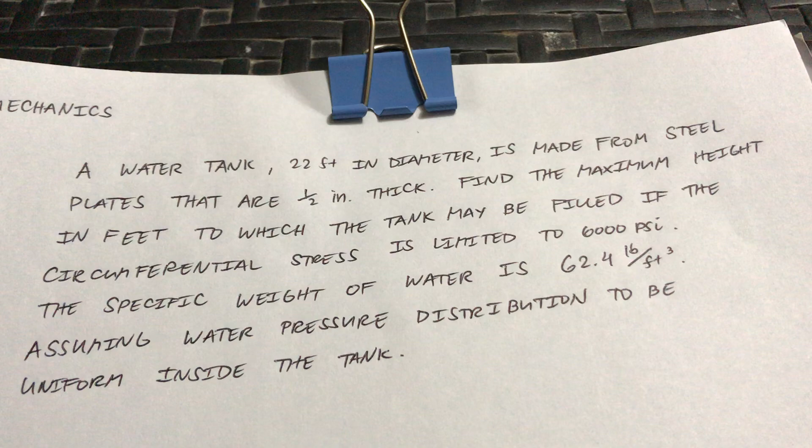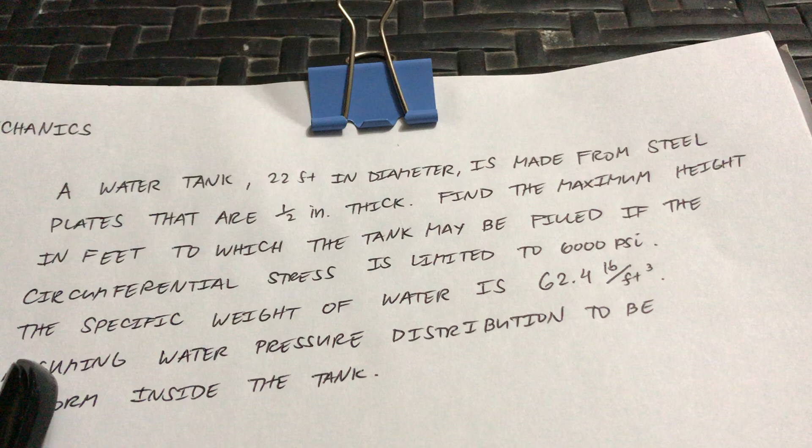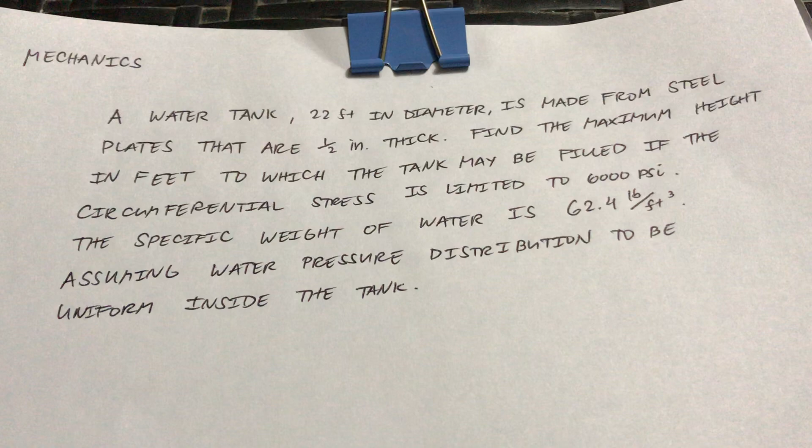Hello everyone, in this video this is the problem that we will solve. We have a water tank 22 feet in diameter made from steel plates that are 1/2 inch thick. Find the maximum height in feet to which the tank may be filled if the circumferential stress is limited to 6,000 psi. The specific weight of water is 62.4 pounds per cubic feet, assuming water pressure distribution to be uniform inside the tank.

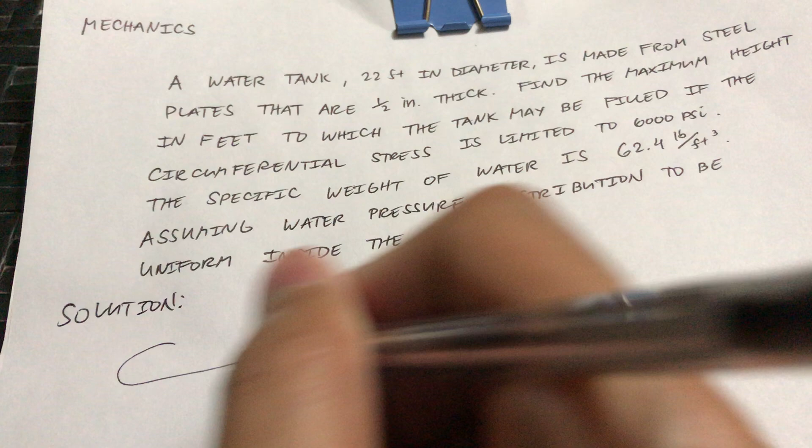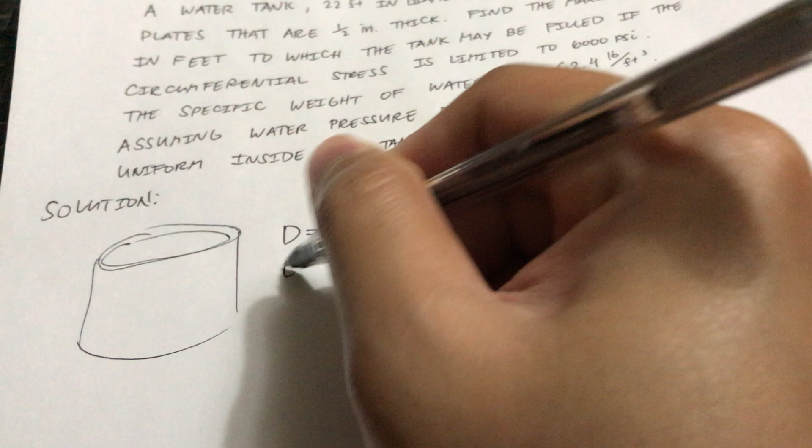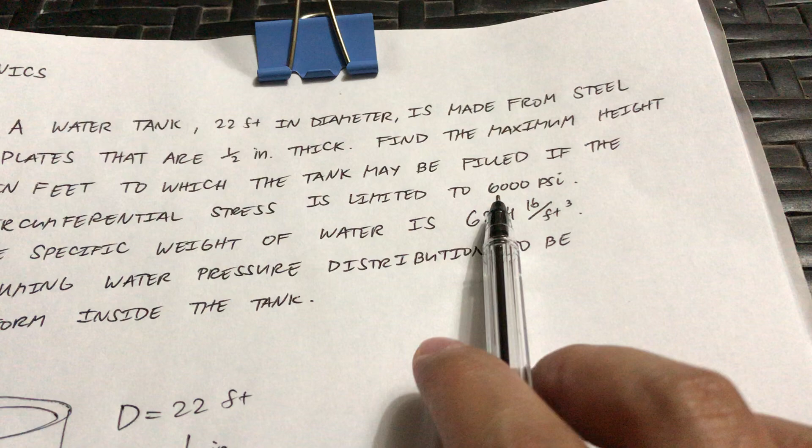Okay, solution. So in this problem, we will have a tank that has a diameter of 22 feet and a thickness of 1/2 inch. Now the question is, what should be the maximum height that we can put in the tank so that it will not exceed the circumferential stress of 6,000 psi.

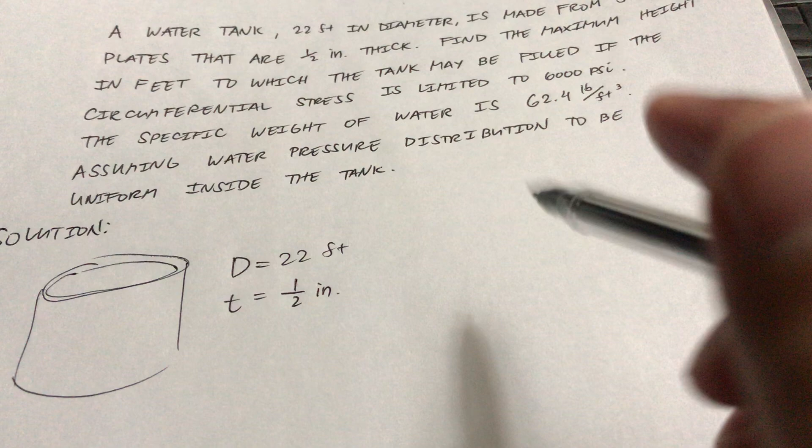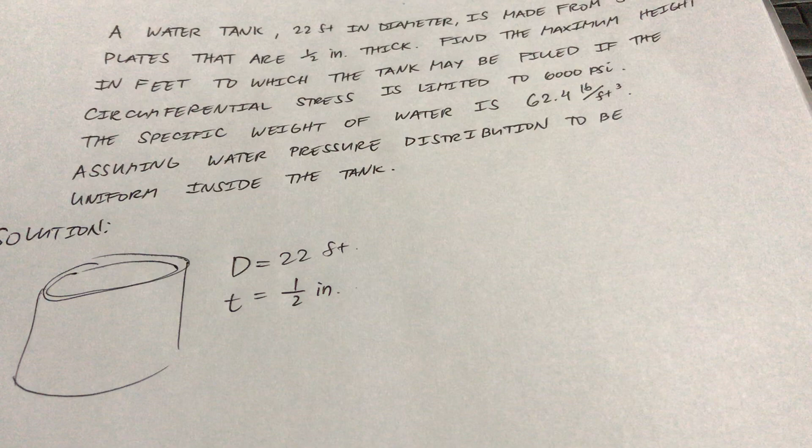Now for this problem, this is considered to be a thin-walled vessel due to the proportion of the diameter and the thickness. The thickness is very small compared to the diameter, which you can determine the specific ratio in our module. So this is under thin-walled vessels, a thin-walled tank.

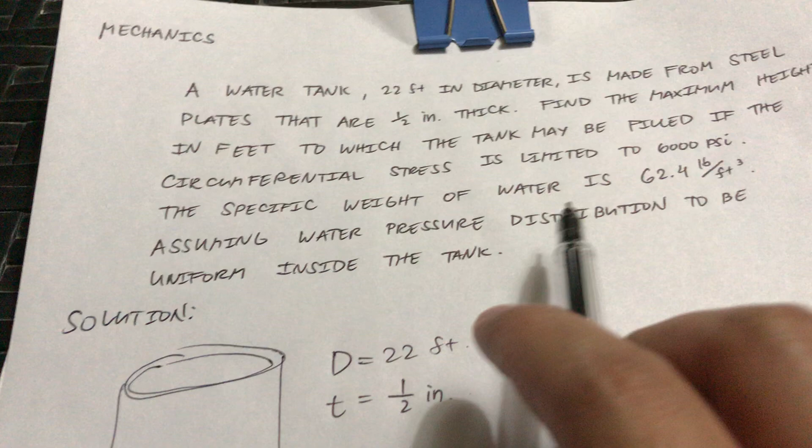Now, the formula for the circumferential stress of a thin-walled tank or vessel is, we have the pressure times the radius of the tank all over its thickness.

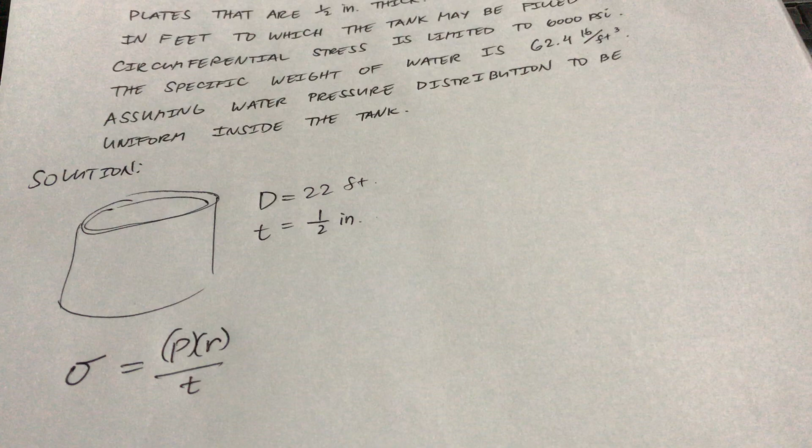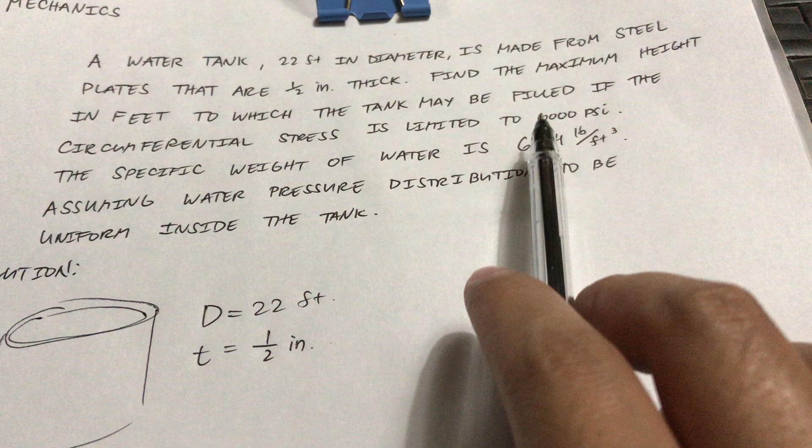Now we are given with the specific weight of the water, and we are given with diameter, the thickness, and we are given with the limiting circumferential stress. Circumferential stress is 6,000 psi.

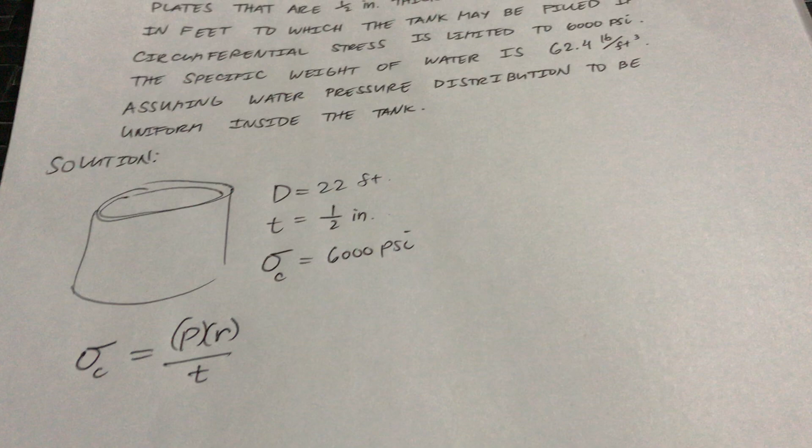Okay, first we need to identify how the water affects the tank. Now, with the water level, let's say for a height of h, since that is the question of the problem, the water will apply pressure to the tank sideways.

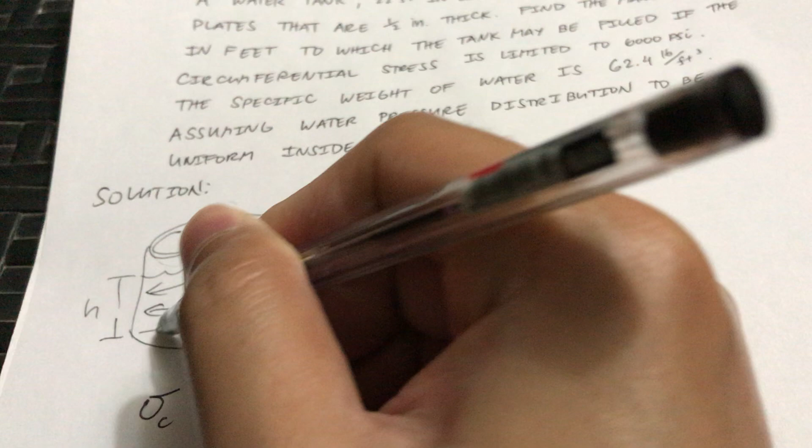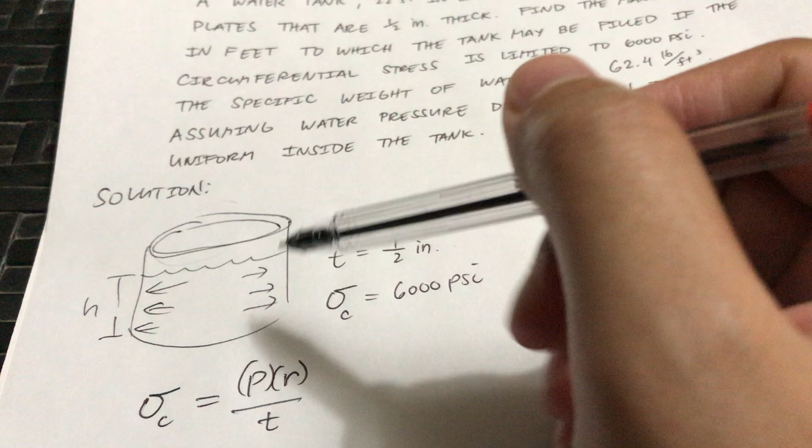Since we are not concerned for the longitudinal stress, we are only concerned with the circumferential stress. So we will consider the force, the effect of the water that will tend to affect the circumferential stress. So the force of the water will try to move sideways and try to break apart the tank.

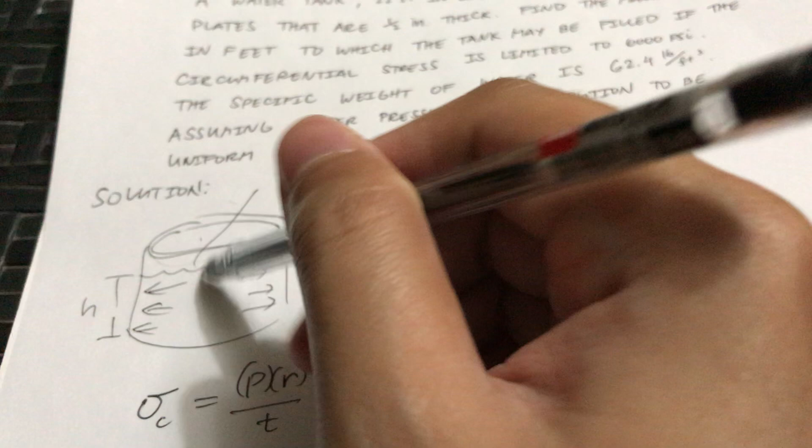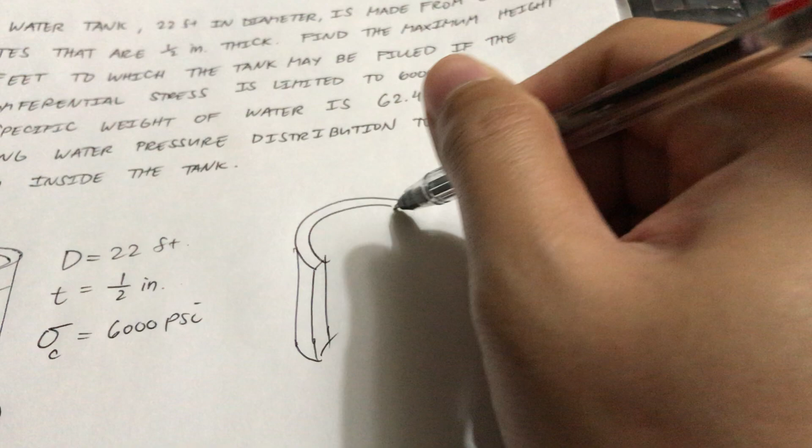Now, to bring out the forces that are affecting the tank, let's try and cut the tank along this plane. So we will have the tank, right. So the force of the water will now be moving sideways. Yeah, the force of the water.

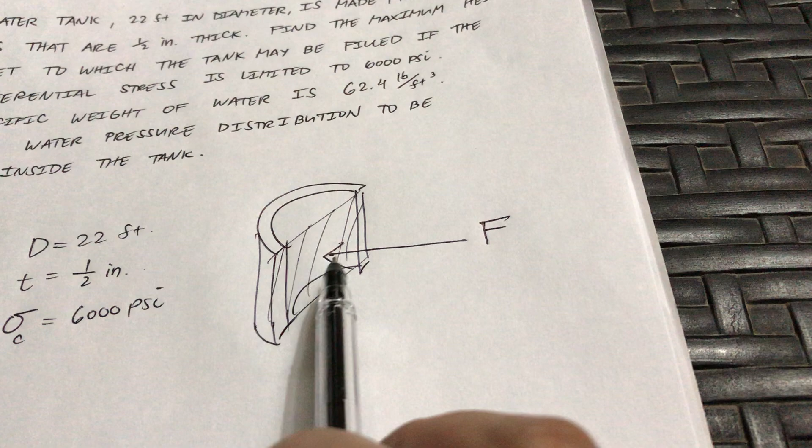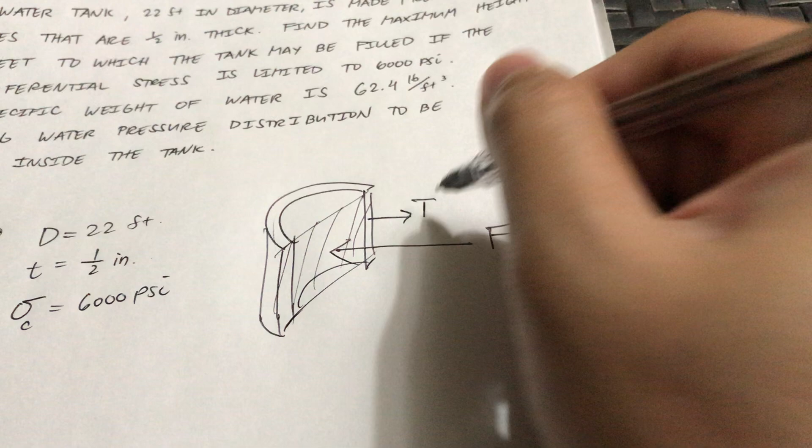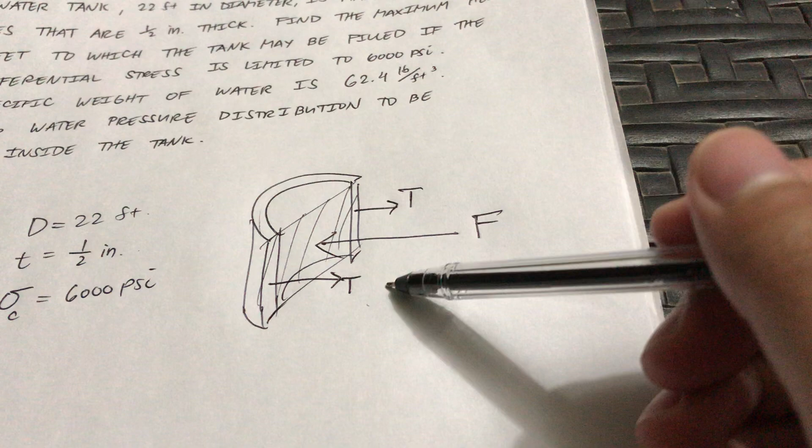And now, to prevent the tank from bursting, the circumferential sides of the tank will apply a resisting force, which we can set as letter T. The force of the water and then the resisting tension developed inside the tank. Now this is 2. One we have here for this side, the other one is for this side. Okay, so there are 2.

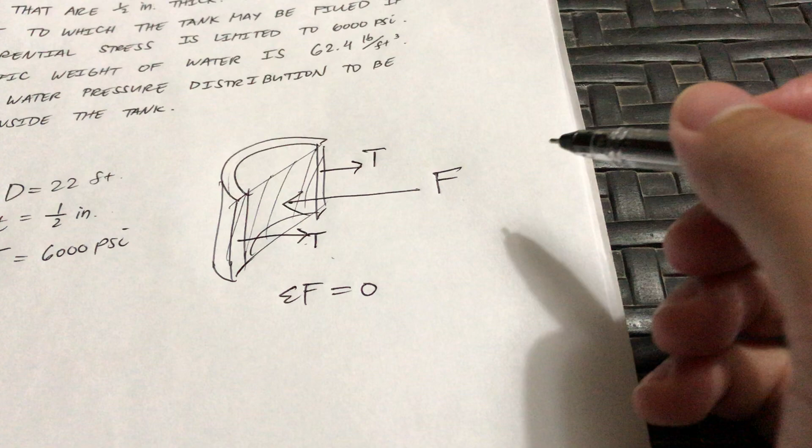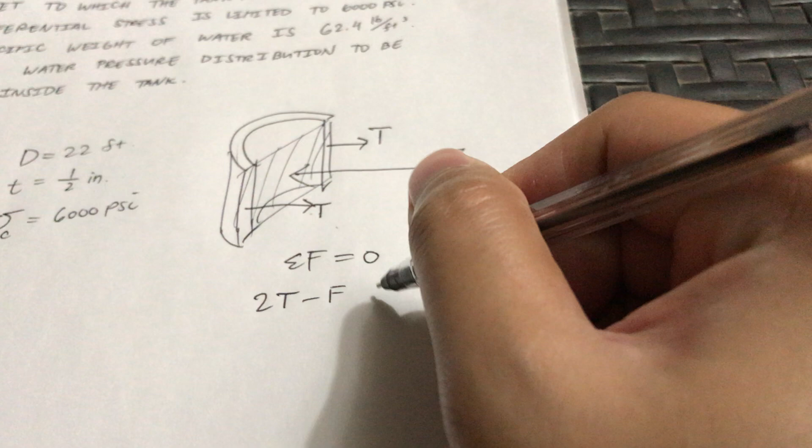So if we sum up forces, is equal to 0 to make the tank remain balanced. So we will have, assuming the T is positive, so that becomes 2T minus F is equal to 0. Now, how do we relate the T and the F with our given?

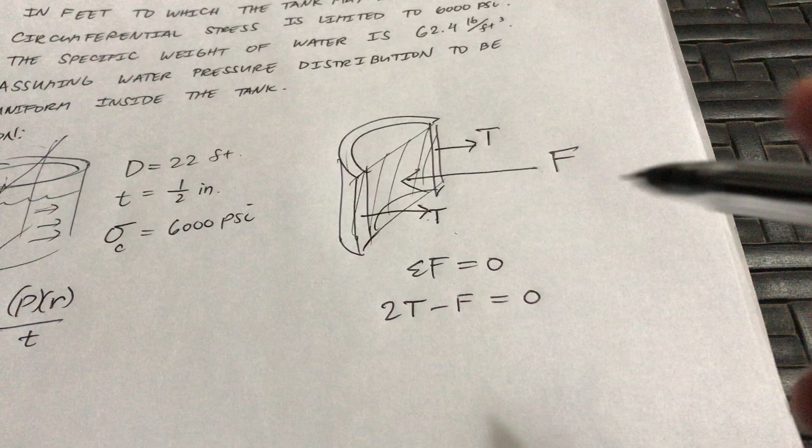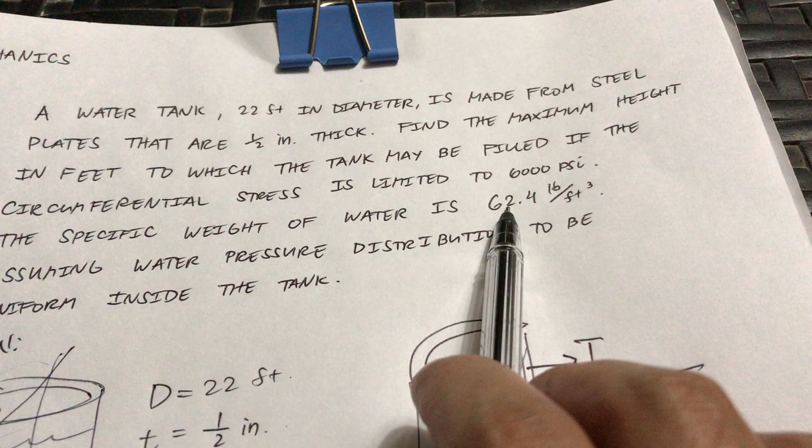Let's start with the force of the water. The force of the water, we have, it will come from the specific weight of the water. Now, this statement is very important: assume water pressure distribution to be uniform inside the tank.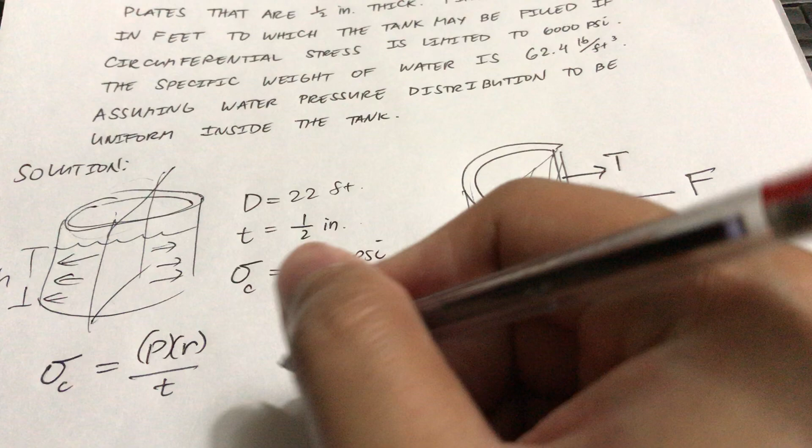What that means is that the pressure inside the tank is simply equal to the unit weight of the water multiplied by its height. So whatever is the height of the water, you just multiply the height with its unit weight, then that is the pressure that the water is applying. So basically, this is now the pressure of the water.

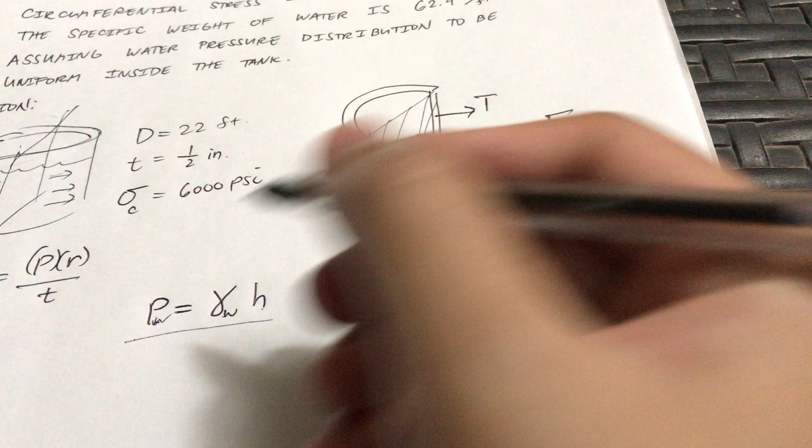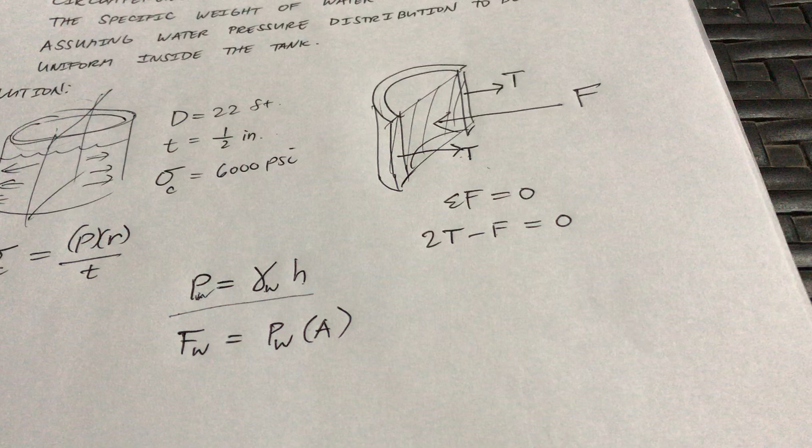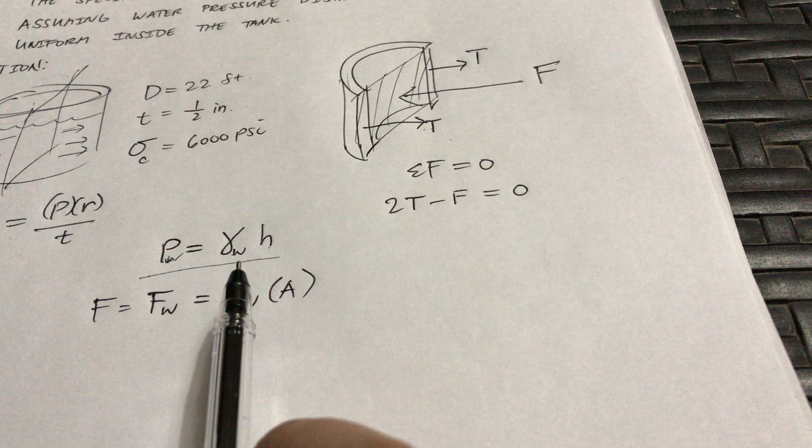Now, if this is pressure, to obtain the force of the water, you need the pressure of the water multiplied by the area wherein the pressure is applied. To obtain the pressure, that is simply, pressure is also a stress, which is force over area. So to obtain the force of the water, which is F or Fw, you simply multiply the pressure of the water times the area where the water is applied.

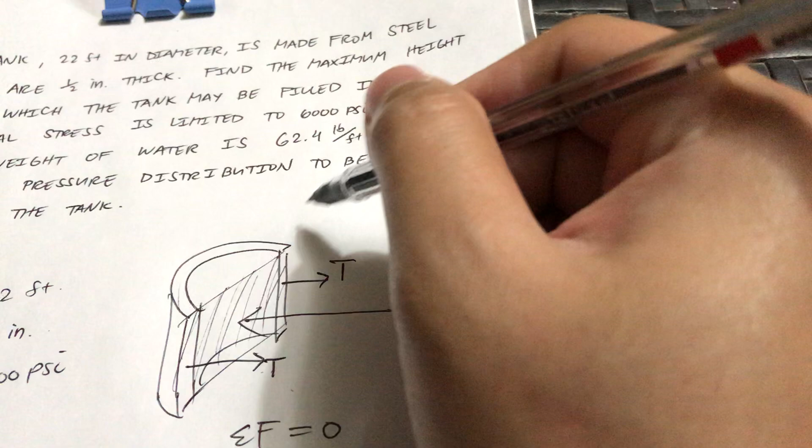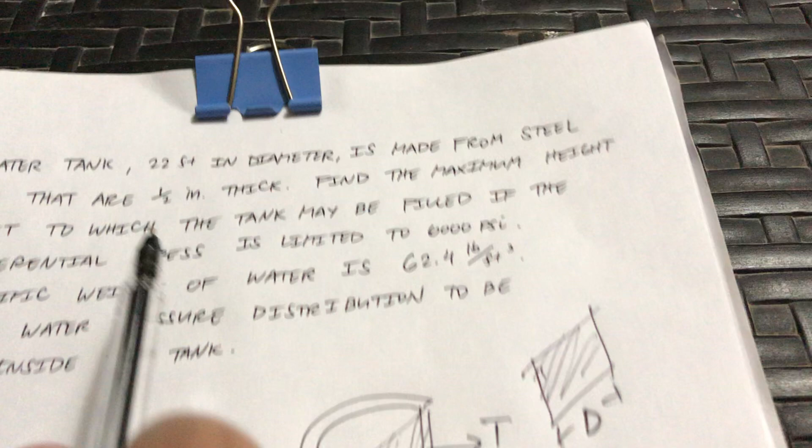So in this problem, we have the force of the water applied in this area. Now this is equal to the diameter of the tank. Now, if you notice in the problem, it states here 22 feet in diameter. It did not mention if it's an inside or an outside diameter. It simply stated diameter. So for simple purposes, we will not subtract the thickness of the tank. We will directly consider the total diameter as this side.

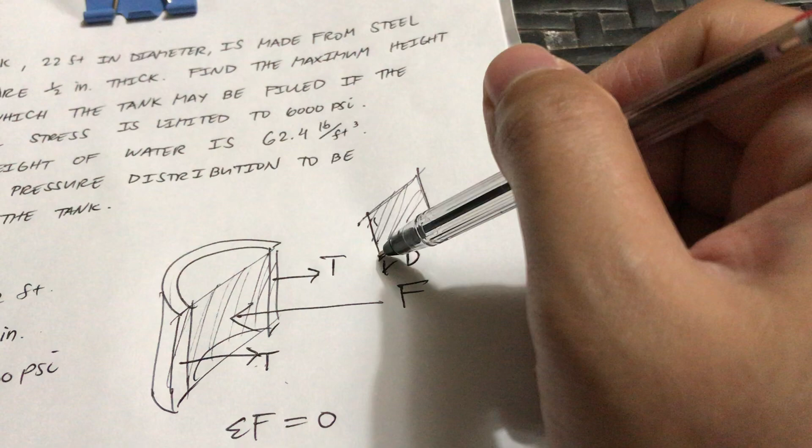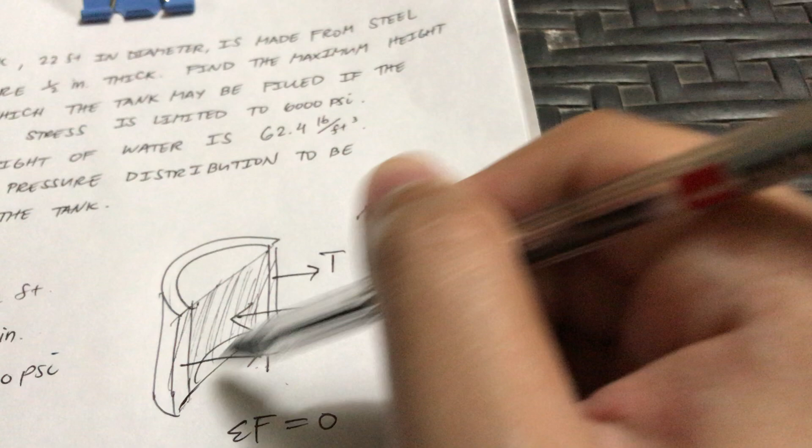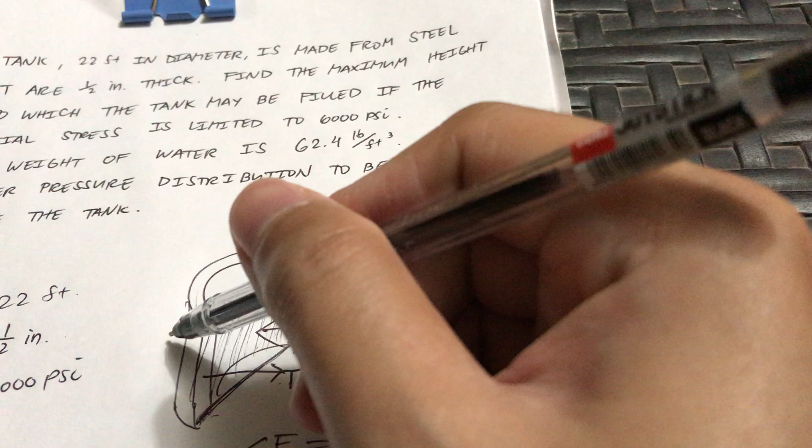Okay, so actually the pressure of the water will only apply within this area. It will not include this small part for thickness, but since it doesn't mention whether the diameter is inside or outside, we will consider this entire whole diameter as the area where the pressure force of the water is applied. So this is D. Now of course this will now be the height of the water, assuming that is where the height of the water is, or how high the water is.

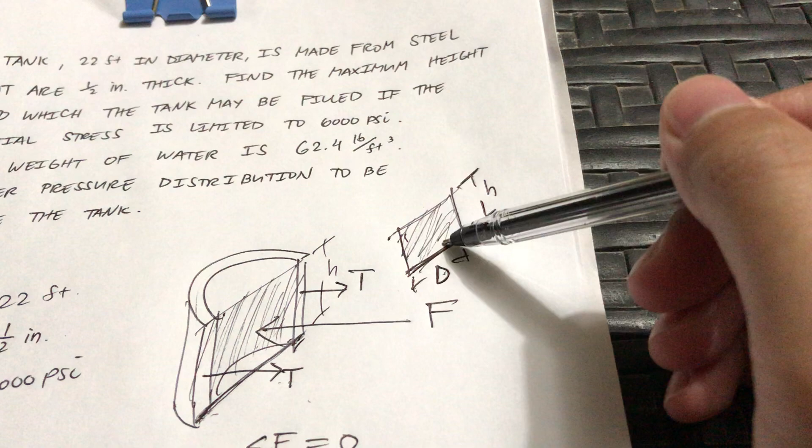So the area is simply this surface, which is D times H. The area for the water is D times H.

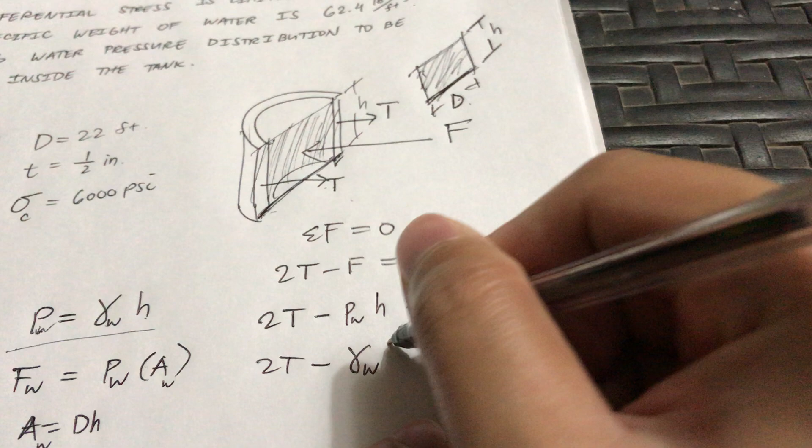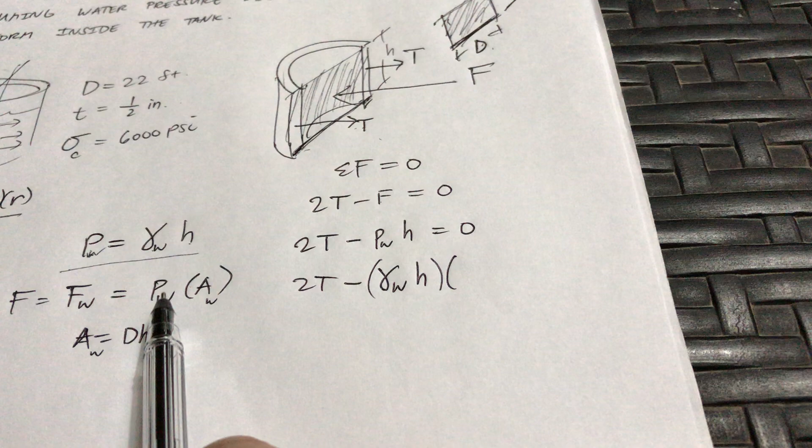Substituting it here, we have 2T minus the pressure of the water times the height is equal to 0. The pressure of the water is the unit weight of the water times the height. The force is the pressure of the water times the area, and the pressure of the water is unit weight of water times height, while the area is the diameter times the height, which is now equal to 0.

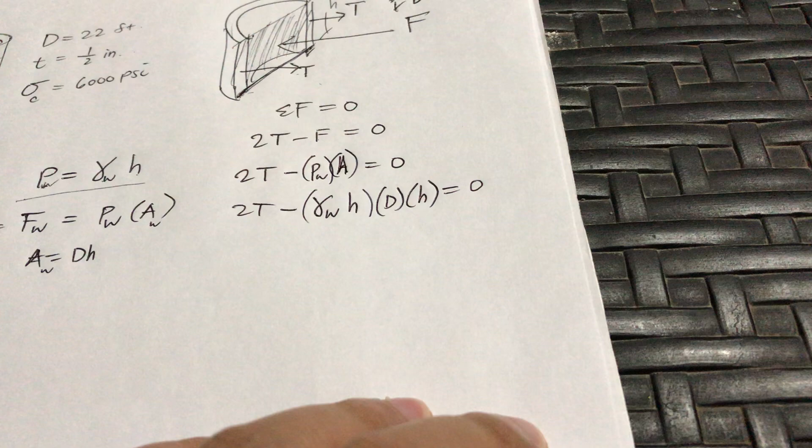Notice this is what is asked in the problem, H. We need to solve for H, that is the question of the problem. We have D, D is 22 feet. We also have the unit weight of water, which is 62.4 pounds per feet cube.

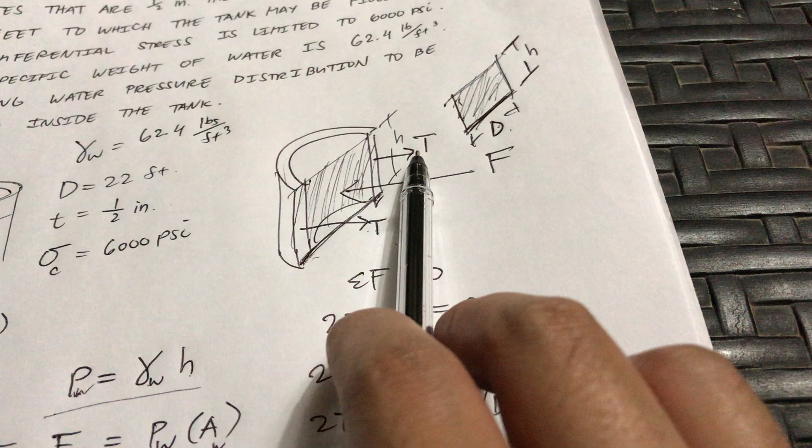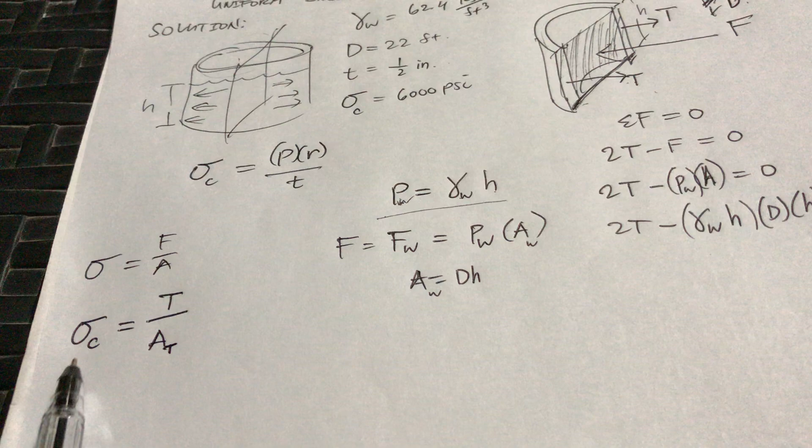Next is tension. How do we relate? We know stress is simply force over area. This tension is actually the circumferential stress, derived from the circumferential stress. So the circumferential stress is equal to the tension developed in the tank over the area where the tension is applied. We are given the circumferential stress as 6,000 psi, and we need T.

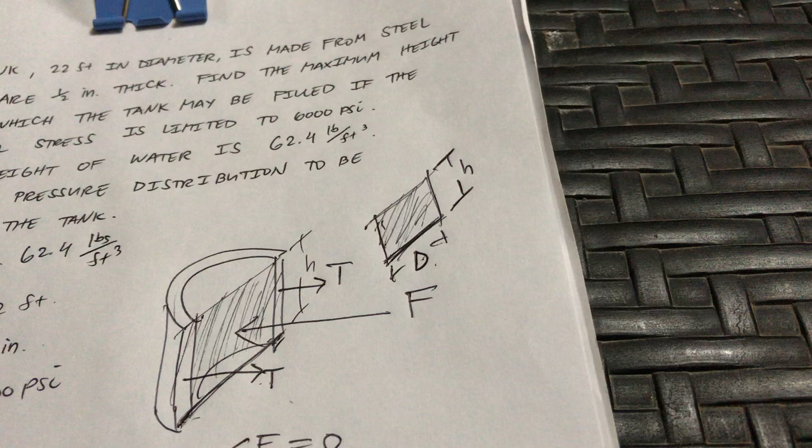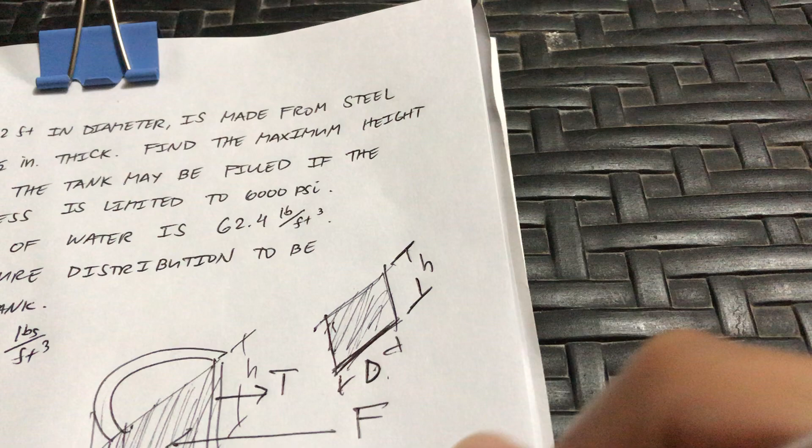The area now where it is applied, let's see. The T is applied in this small strip of the tank. If we draw it here, this is the height and this is the thickness of the tank, so the area is the height times the thickness.

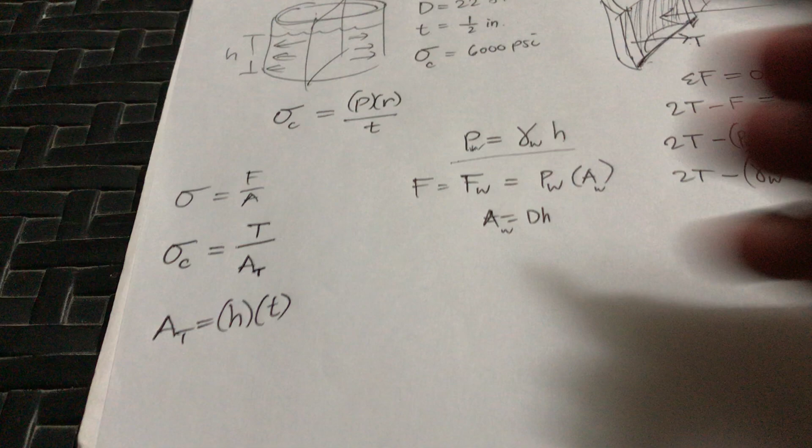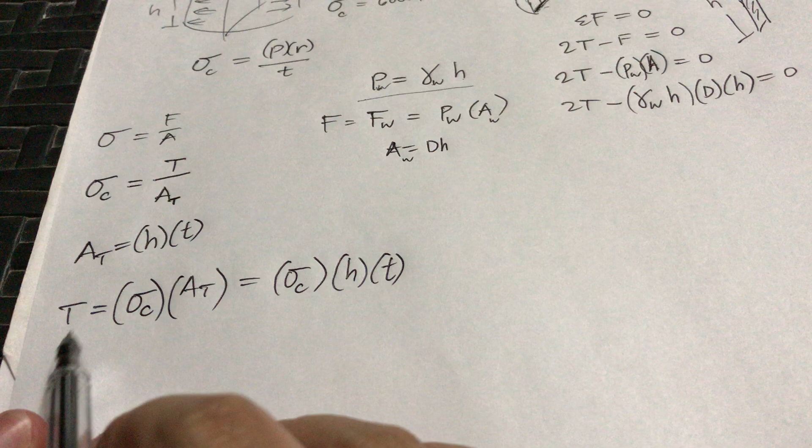So to solve, T is the circumferential stress times the area, which is also equal to stress circumferential times the height times the thickness. Substituting it here, we have 2 times T is stress times height times thickness.

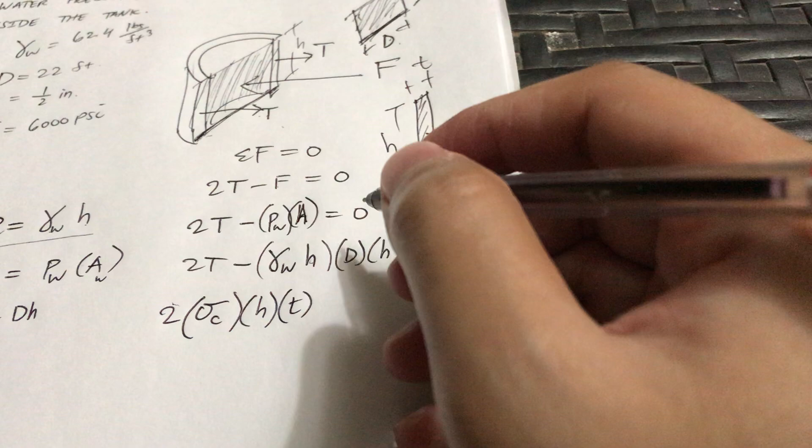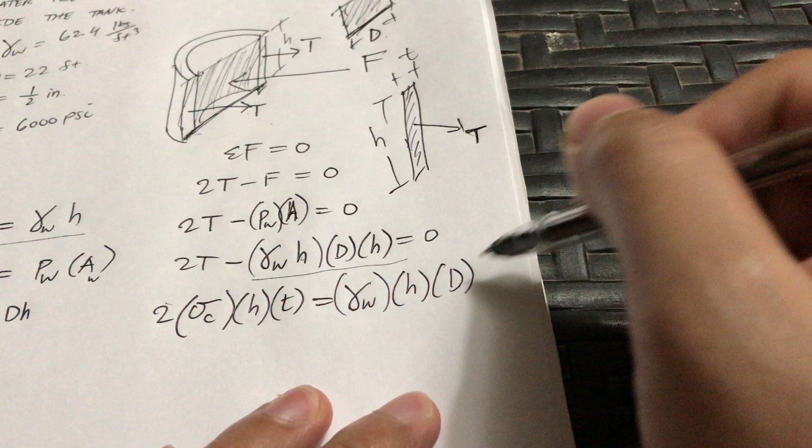Now let's transpose this one to the other side. We have unit weight of water times h times the diameter times the height. We can cancel one of the h.

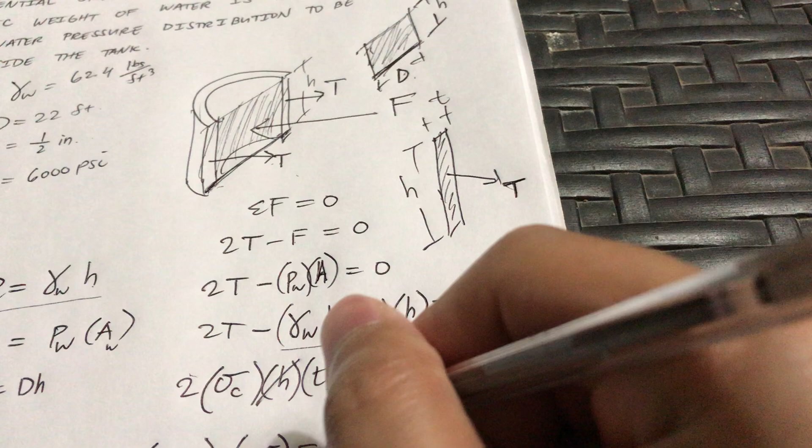Substituting the values, we have 2 times 6,000 psi, pounds per square inch, times the thickness, which is 1/2 or 0.5 inches. Then we have the unit weight of the water, 62.4, and the diameter is 22 feet, and then we have the height.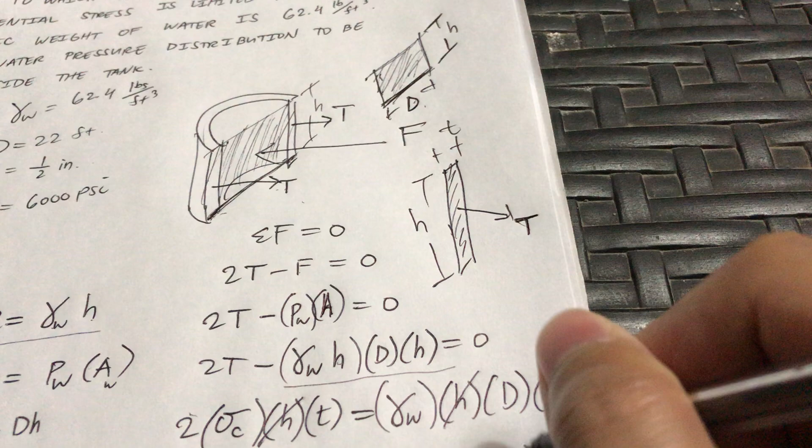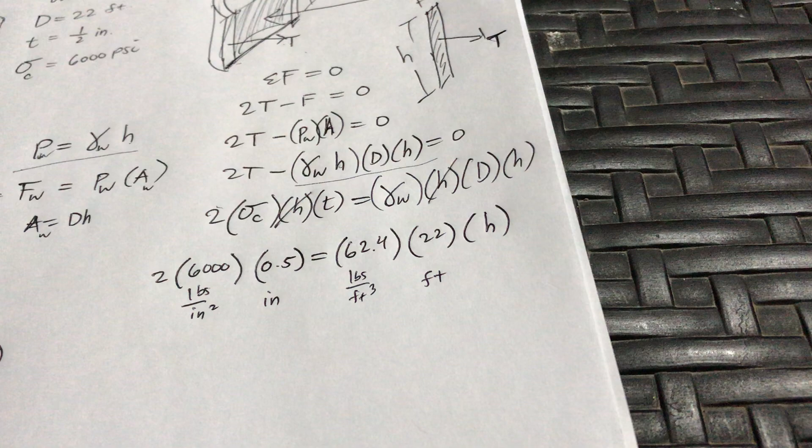So if you notice, we only have one unknown. But first, let's check the units. This is pounds per inch squared, this is also inch, this is pounds per feet cube, this is also feet. We need to convert either inch to feet or feet to inch.

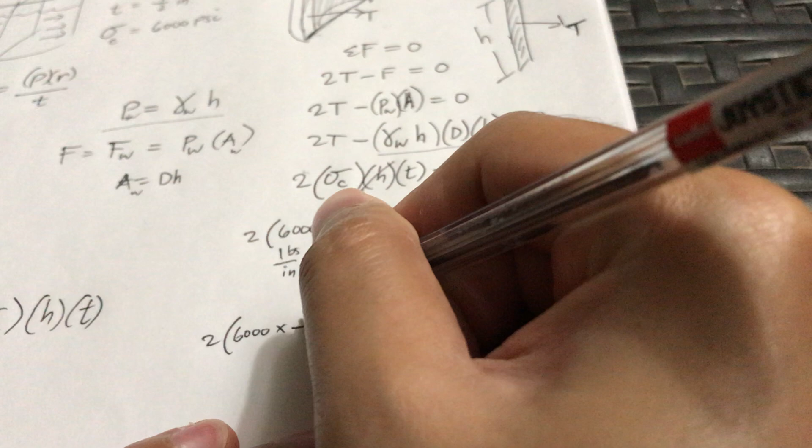Let's read the problem: find the maximum height in feet. So we need to change the inches into feet. We have 2 times 6,000 times 1 foot is 12 inches, squared, times 0.5 inches, since 1 foot equals 12 inches. Then we just copy 62.4 times 22 times h.

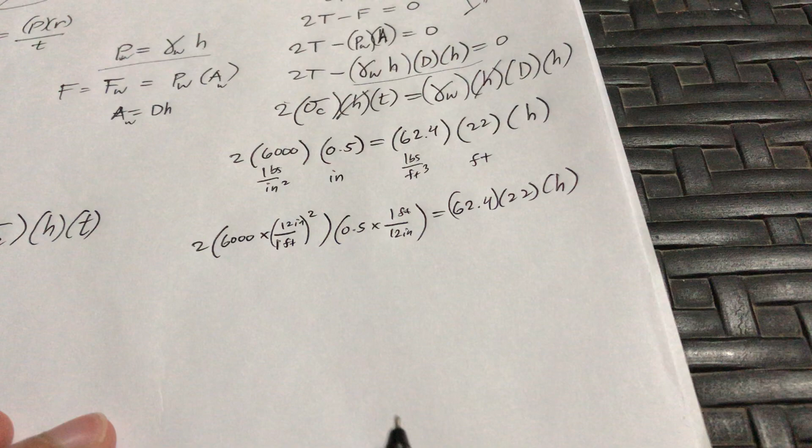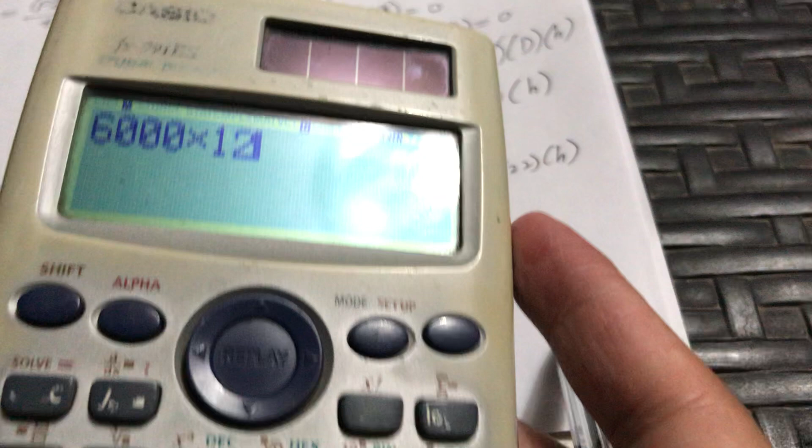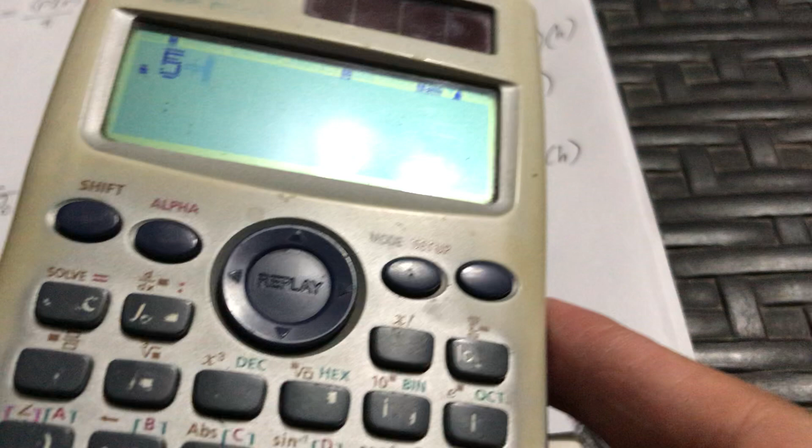Let's simplify these terms first. 6,000 times 12 squared gives us 864,000. 864,000 times 0.5 divided by 12, that is 1/24. Then we have 62.4 times 22, times h.

This is now pounds per feet squared, and this is also now in feet, so everything is now in pounds and feet. Rearranging to solve h, we have 2 times 864,000 times 1/24, over 62.4 times 22. Transferring this 2 to the other side, so it will now be divided.

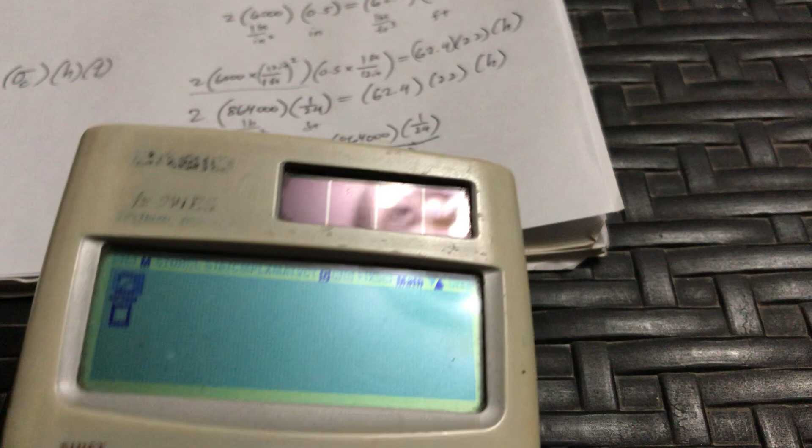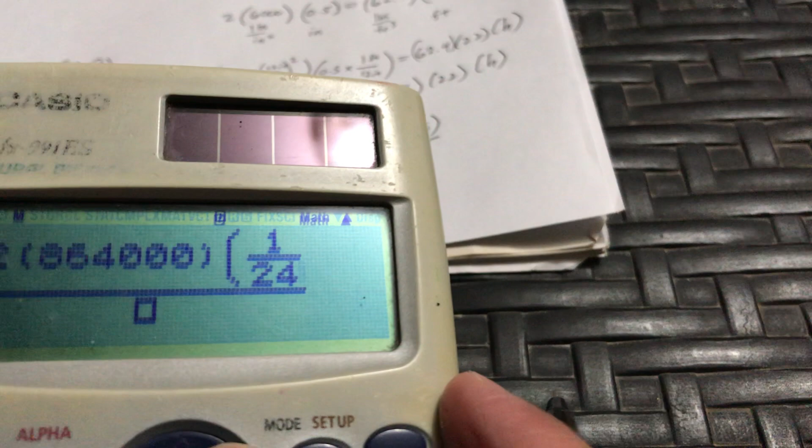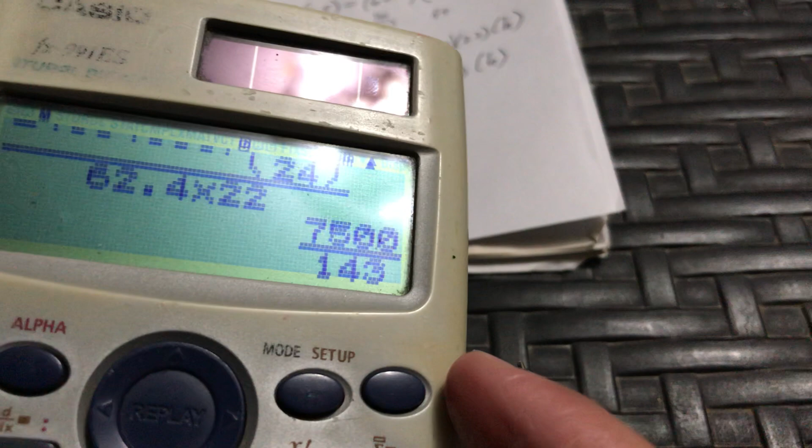Solving for h, we get 2 times 864,000, times 1/24, divided by 62.4 times 22. And we have 52.45.

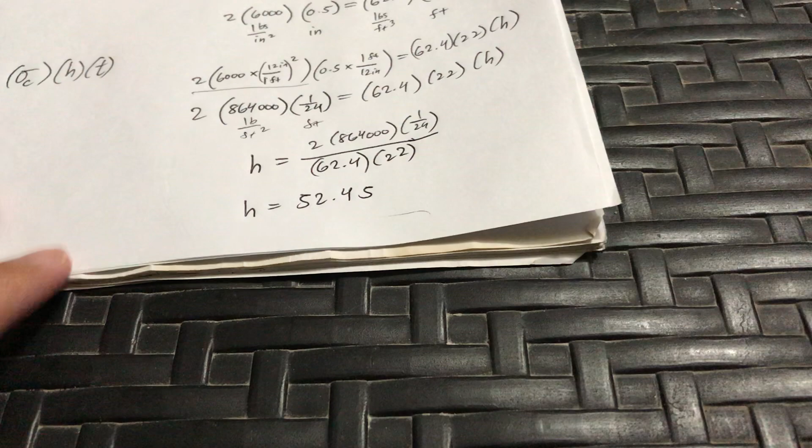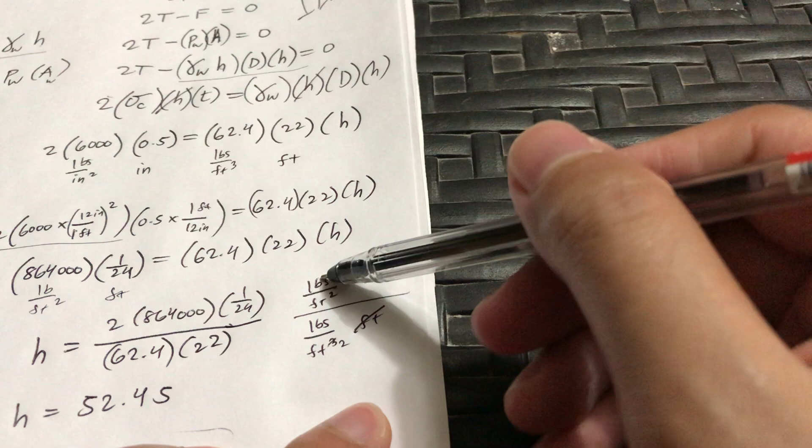Now let's check what will be the resulting units. This is pounds per feet squared, this is in feet, this is pounds per feet cube, and the unit of 22 is feet. So we cancel out feet, cube becomes squared, this cancels with that, so only feet is left. So this is now feet.

52.45 feet, that is the maximum height that we can set for the water to not exceed the given circumferential stress.